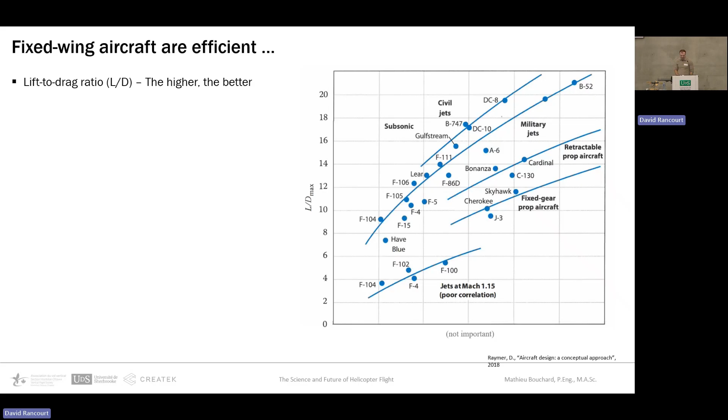There's a nice figure here that I took from some classic manuals, Raymer for those who know. The x-axis doesn't matter here, the only thing you need to know is that higher is better. There's a bunch of aircraft here, one we all know is the 747, which has an L/D of about 18, so that's a pretty good aircraft.

There are better, more aerodynamic aircraft out there, but that's still pretty good efficiency. On the lower end, if you ignore military aircraft, you have the kind of aircraft David might fly, a small general aviation aircraft, more of a brick with wings, but still an L/D of about 10, typical of these kinds of aircraft.

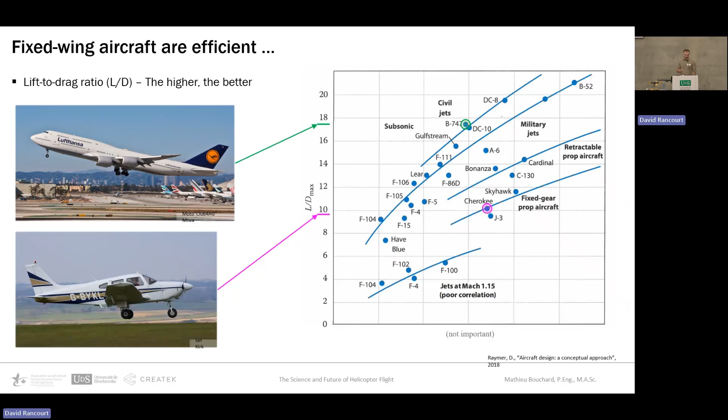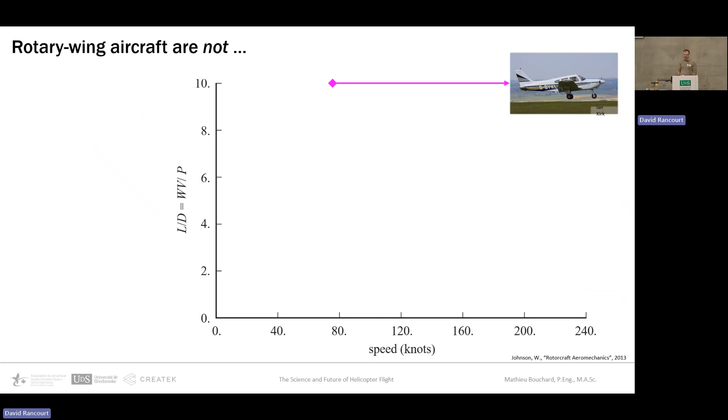So fixed wing aircraft are somewhat efficient. Rotorcraft are not at all. Here's a similar figure, L/D on the left, higher is better, although this one ends at 10 with the Piper Cherokee's L/D max. Then you have speed on the x-axis, which isn't too important here.

There are other models cheating a bit with compound helicopters, which add wings and propellers, you can get better efficiency, but not that much. Same thing with tilt rotors, which aren't really helicopters at that point, but even in airplane mode they're still pretty limited in aerodynamic efficiency. So if you want to fly fast or go long distances, your best bet is not to take a helicopter, just take a plane.

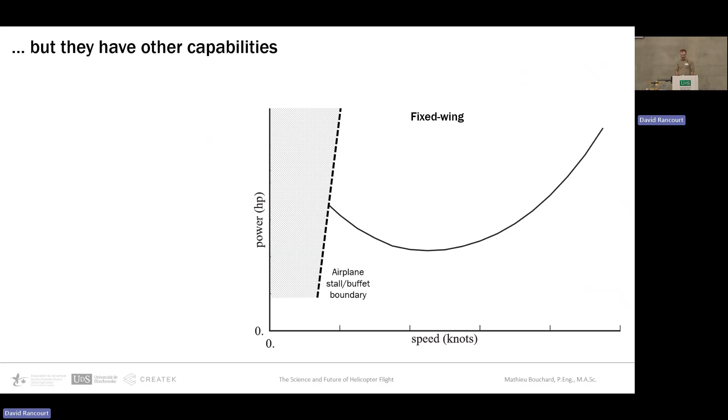But helicopters do serve an important purpose, because fixed wing aircraft are actually limited in terms of the speeds they can go when talking about going really slow. Sadly, aircraft tend to fall out of the sky if you go too slow, which isn't the case with any kind of rotorcraft, that's the only advantage they have.

So the main advantages, the only reasons you might want to fly a helicopter: if you don't have access to a runway and want to land vertically, they're the only option. Or to do any kind of sling load operation, lifting cargo from the air vertically, which you can't do with a fixed wing aircraft. Or, as this little quote from Igor Sikorsky puts it...

If you want to rescue a man who's in need of help, an airplane can come in and throw flowers at him, but it can't bring him up. A helicopter might be able to do actual search and rescue. With an airplane, you might spot the person, but you're going to leave him there.

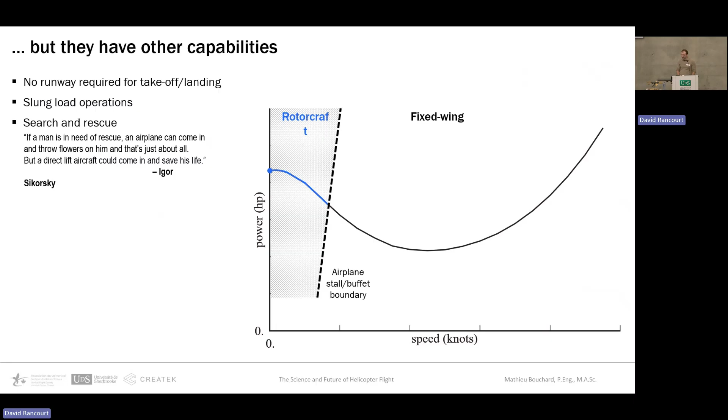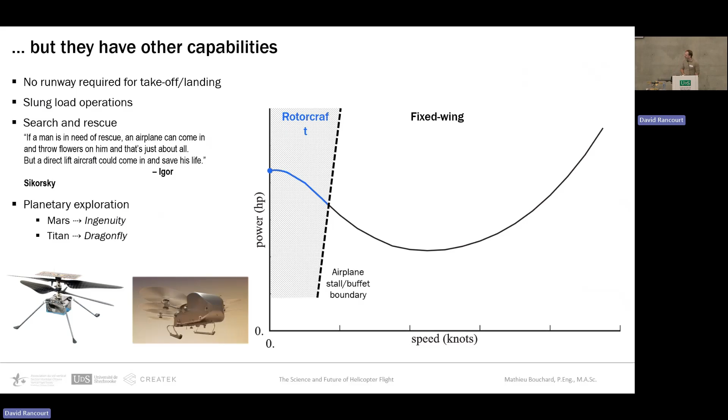One other aspect is that for some reason it's a pretty good solution if you want to explore outside the Earth. For planetary exploration, although typically fixed-wing aircraft are good for long distances, you're not going to beat rotorcraft if you want to explore Mars or Titan. So for really long distances, helicopters are kind of better than fixed-wing aircraft at that point, although those are pretty fancy aircraft.

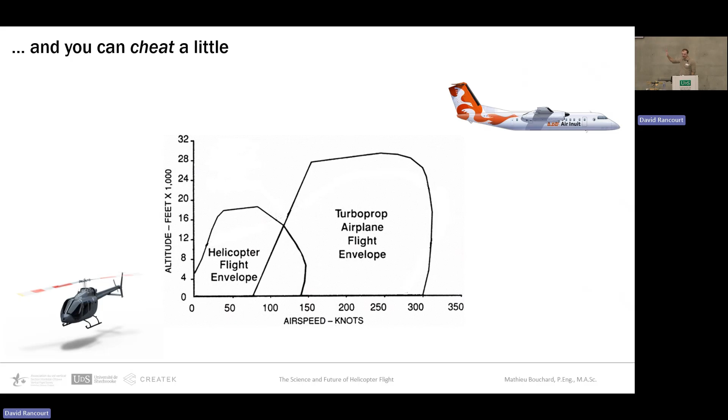Another way to cheat is to add wings but also tilt your rotors. For a tilt rotor aircraft, you'd actually call them prop rotors. You can go way higher and even bridge the gap to go faster speeds - kind of a mix between a helicopter and a turboprop aircraft. Although right now there's no civilian version that's certified, so it's kind of limited to military applications.

So that's the overall picture on whether you should choose an airplane or a helicopter, or any of the bastardized versions of the helicopter. If you want to go long distances, I'd recommend using a fixed-wing aircraft unless you don't have any runway access. And that's not something that's going to change a lot over the next decades. There are gains that can be made, but it's always going to be less efficient than the airplane.

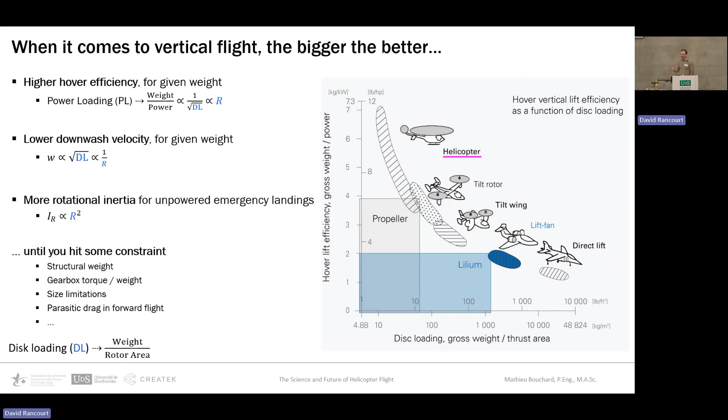Obviously there are still limitations, so bigger isn't always better. If you have a rotor as big as this room, at some point you're not going to be able to land anywhere. So there are limits in terms of weight and other design criteria. Until you hit that constraint though, you want the bigger rotor if possible - there's no reason to go for a smaller rotor diameter.

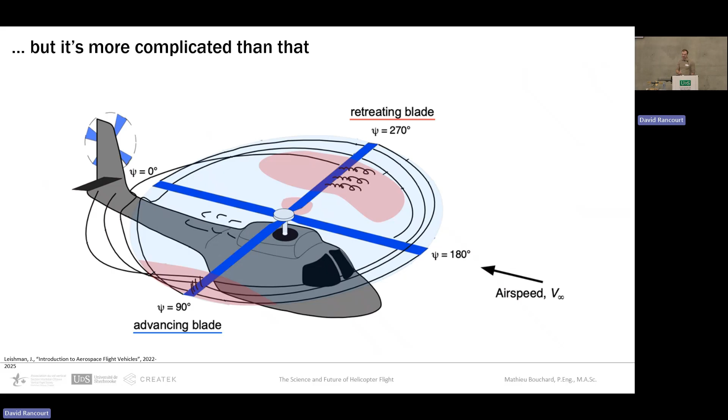Helicopters are good for vertical flight, extremely efficient, but you still want to go somewhere with your helicopter. So unless you just want some kind of elevator, you're going to need to go forward, and that's where you lose all your efficiency and things get really complicated. For this presentation I'm going to keep it to the most basic problem with helicopters: the fact that one blade is advancing towards the direction of flight and one is coming back in the opposite direction, and both see completely different velocities, creating a problem when it comes to generating lift.

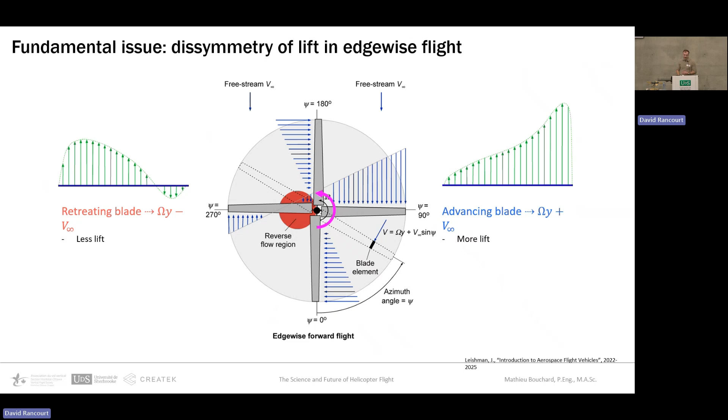So instead of having a nice airplane wing traveling at a constant speed, seeing the same airflow velocity over the entire wing, you have a rotating wing which every second sees a different flight condition, for the entire flight. You have to design a wing that operates in two completely different regimes: one near high speeds, transonic flight, and the other near stall, which is typically an issue for airplanes and also an issue for a helicopter rotor. That's the most basic issue with helicopter flight.

So the fundamental issue is the dissymmetry of lift. What that does is create a rolling moment, which historically, about 100 years ago, caused the initial prototypes - actual gyrocopters - to just roll over on their side when trying to go forward. That's not really useful for a helicopter. That's where all the complexity of the rotor comes from, trying to rein in that problem and balance that rolling moment.

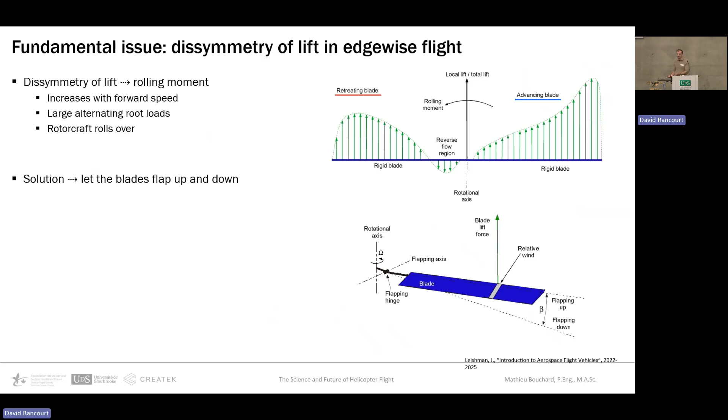It's also an issue in terms of structural loads. The solution is quite simple: if the blade wants to go up, you might as well just let it go up and then let it go down again. Don't fight it, just let it do its thing. So you basically get what we call blade flapping, with the blade going up and down in a sinusoidal motion during the entire flight.

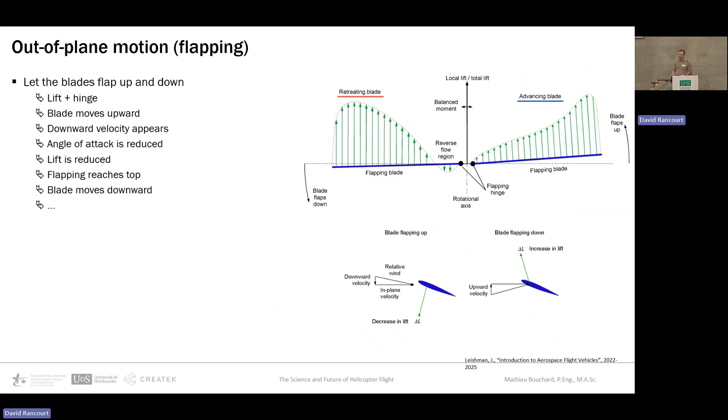If we cheat a little - no need to go too much over that - there's going to be some equilibrium reached at some point, and basically you balance that moment, and the aircraft won't try to roll over on its side anymore. So you end up with little flapping hinges, which is why rotors typically have a flapping hinge - which we don't have on this type of propeller or rotor - allowing it to go up and down by itself.

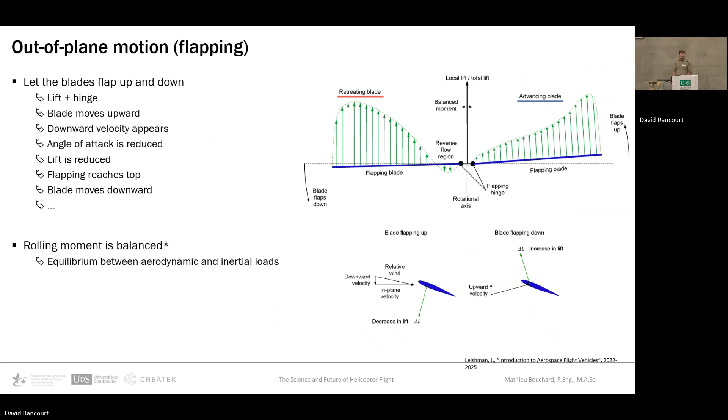There is a little issue that comes out of this. You end up with a displacement of the center of gravity of the blades. Globally, if you don't take care of that problem, you're going to end up with a blade which has extremely high loads in terms of in-plane motion, and it would simply break off, which is what happened about 100 years ago when De La Cierva was trying to fly his gyroplane.

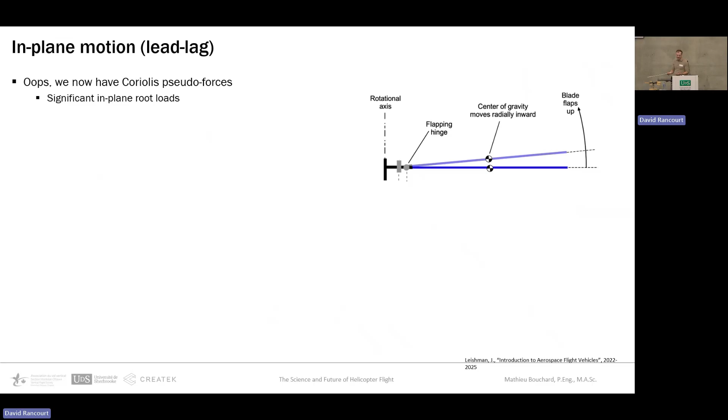The same solution functions again: just let it move forward and backwards by itself. There's no need to try and stop it. So that's where the lead-lag hinge comes from, an additional hinge where we let the blade flap up and down, but also forward and backwards.

Little issue though: on some types of helicopters, some rotors, you're going to end up with possible ground resonance. If you've seen those kind of videos, the entire helicopter will self-destruct if the pilot doesn't come off the ground. That's inherent with the type of design. If you let your blades go forward and backwards and don't do something about it, it can happen, it's just the nature of it. One solution is to add dampers to try and damp the motion, but there's still always a possibility of that happening, just more controlled than before.

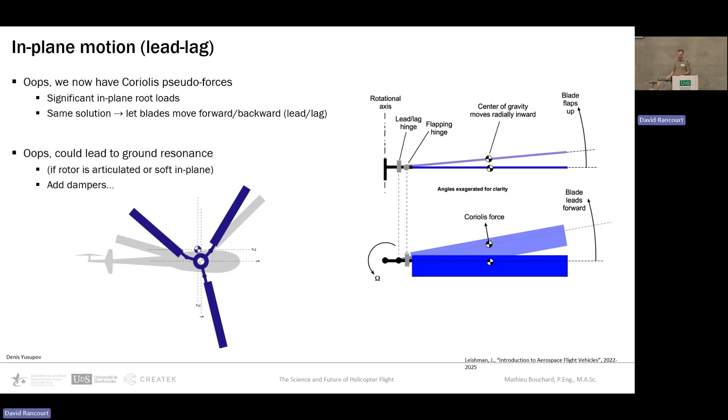Sadly, if you want a rotor which goes forward, you're going to end up with something complicated like that, which has to allow the blades to go up, down, forward, and backwards. There's really no other way of going around that problem.

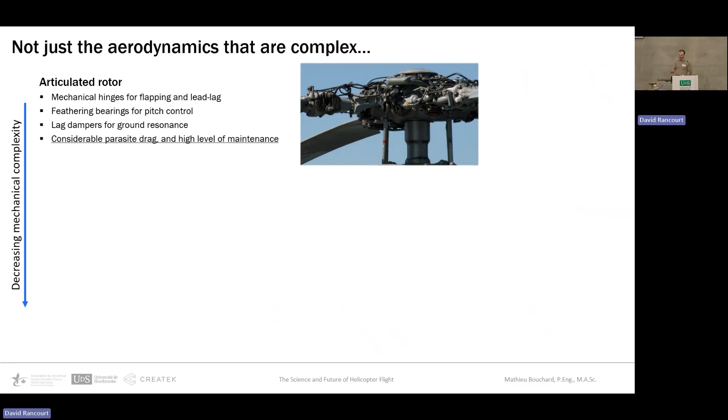In between those, you have what you're maybe used to seeing on Robinson helicopters, which is the teetering rotor. Those simplified designs work only for 2-bladed rotors. They're already relatively simple, but they have some inherent flaws, such as you can't actually do any kind of low-G flight. If you're in a helicopter and try to rapidly go down the side of a hill, you could potentially lose control, and depending on the rotor design, end up with mast bumping, which could lead to rotor separation or a tail boom strike. So they can be dangerous depending on the type of rotor. You're not going to do any aerobatics Red Bull style with that kind of rotor.

You're going to be limited to a nice little flight over the city to view the sights. A bit more complicated in terms of design, but much less complicated mechanically. You actually have here a Bell rotor head, which is hingeless. The idea is to get rid of the mechanical systems. Instead of having actual mechanical hinges to allow the blades to move forward and backwards, you just let the blades bend by themselves, so there's actual flexibility in the blade design to allow that motion. The blade still goes up and down, still goes backwards and forwards, but it's actually bending either the blade or a piece made to bend rather than having mechanical hinges. So we end up with a more simple mechanical design, less maintenance cost, and hopefully more aerodynamic in terms of drag later on.

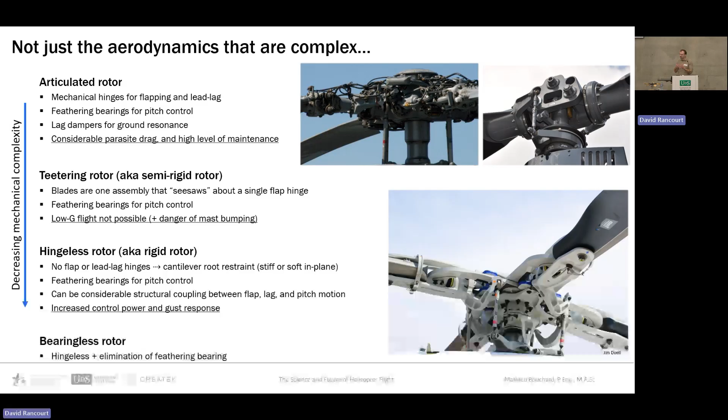The more extreme version of this is you also remove the bearings used to change the pitch angle of the blade, and instead bend the flex rotor tube. You're actually bending part of the blade system rather than having an actual hinge with a bearing to allow the blade to change angles. That's even more of an extreme solution. There aren't many helicopters with those kind of rotors, but again, you have a more mechanically simple and aerodynamic blade system, rather than the articulated rotor, which is the typical solution you'll find on most helicopters.

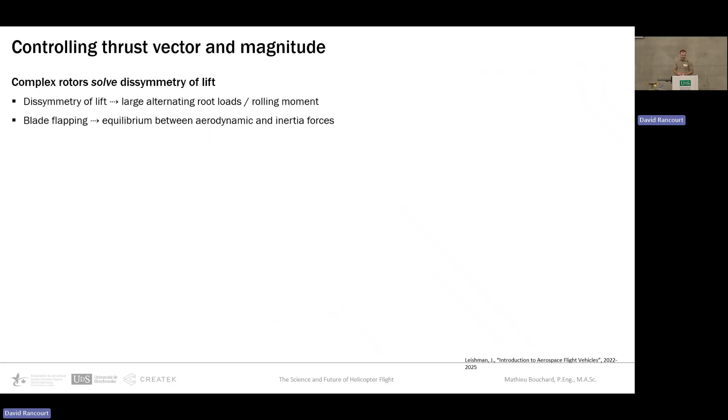So there's another issue which comes up with the fact that we're letting the blades flap up and down. Although you solve the rolling moment problem, you also end up with another problem, which is that the rotor, the faster you go forward, tends to want to blow back behind. So it tilts backwards, and the faster you go, it's even more backwards.

So unless you have some kind of propeller to pull you through the air, which is what you get with a gyrocopter, with a helicopter there'd be no way to actually go forward because the thrust vector would bring you backwards. So to do that, you actually need to find a way to control when the flapping happens, so that you can orient the plane of the rotor.

One aspect to understand is that a rotor will not actually tilt fully forward, the shaft will always be fixed with the airframe. What you'll see when a rotor seems to be tilted forward or sideways is really just the tip of the blade bending in a direction, which gives the idea that you have an actual tilt of the rotor, but rather the hub is still fixed and the blade is bending up or down.

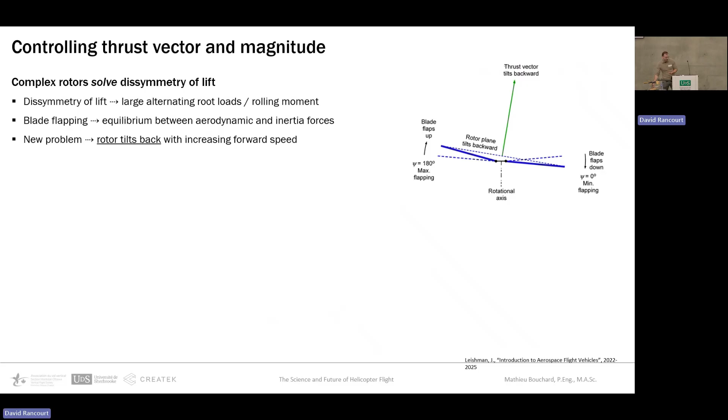So to do that, for most helicopters at least, we have the swash plate system, which is what we have here, at least part of it for this helicopter. Typically there would be another plate underneath, which allows you to either change the angles of all the blades at the same time, so you generate more thrust, can go faster or just go higher and lift more weight, or you can tilt it on the side, which will have a different angle depending on which position you are.

So one blade will be at a certain angle of attack while the other will be completely flat, and that will change when the lift is created, which allows you to play with the tilt of the propeller. For most helicopters, that's what's used. Some designs like the Kaman K-Max use another system, but it's always the same principle: you're trying to control, using a sinusoidal approach, the blade pitch of the entire system to tilt it.

So the faster you go, not only is the pilot pushing the stick forward to go forward, but he's also basically trying to balance back the rotor tilting backwards. So he always needs to put more cyclic forward to bring back the rotor forward and then tilt it even more to go faster.

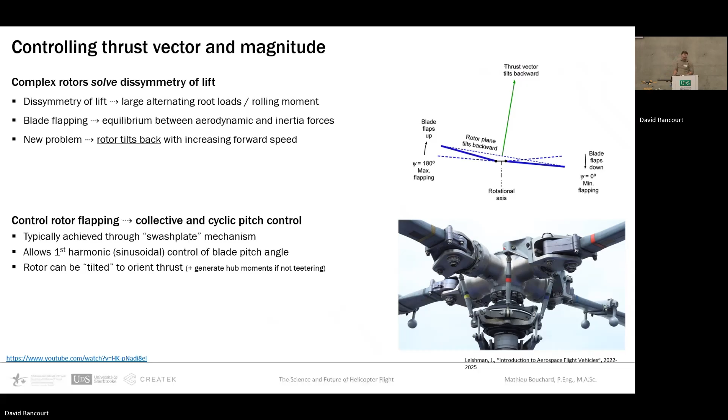And yeah, it's much more complicated than that. So that's really, really the basics. It's the fundamental problem which was solved about 100 years ago now, initially on gyrocopters and not on helicopters, funnily enough, but it's what basically allowed helicopters today to exist, and it's the fundamental principle behind every kind of helicopter now. In reality, you have much more problems than that.

As you go faster and faster, you'll reach conditions where you have high speeds at the tip of the blades. So over here, you have transonic flow, so you can imagine you're getting some really high speeds there. While on the other side of the rotor, the same blade will start stalling and get into a higher kind of unsteady behavior, which is called dynamic stall, which today is still a subject of research, and there is no nice way to model it easily nowadays still.

And what that's going to get you is, instead of having nice sinusoidal waves of thrust and something similar, you'll get really interesting patterns of loads which are generated and which the system must deal with. That's part of the reason you have so much noise and vibrations on the helicopter. It's basically a complex environment of aerodynamic interference coupling with the structure.

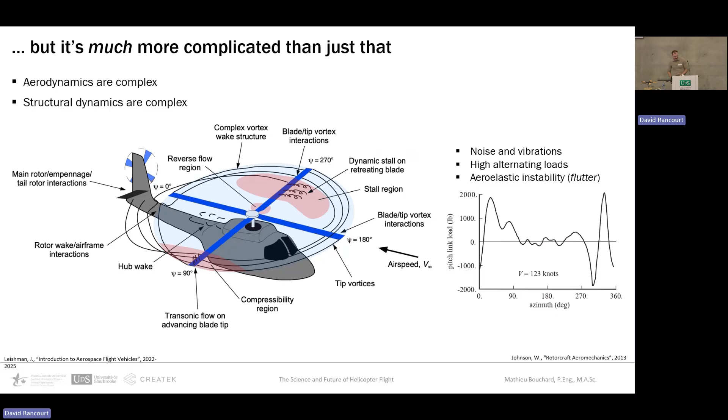So kind of a review on Rotorcraft. I have a couple slides to change the subject a bit and discuss propellers. Some of you might have seen that a lot of current aircraft designs, mainly VTOLs, are starting to use propellers rather than rotors to do the same kind of operations you'd see on a helicopter. So in a way, a propeller is really just the limit case of a rigid propeller rotor.

It's not exactly that, but it's pretty similar. Worst case, there is no blade flapping, no lead-lag, no cyclic pitch control. Some don't even have collective control, so you can't change the pitch of the blade at all. It's basically just RPM control. So that's a bit of an issue because they're not made to operate in those kinds of conditions.

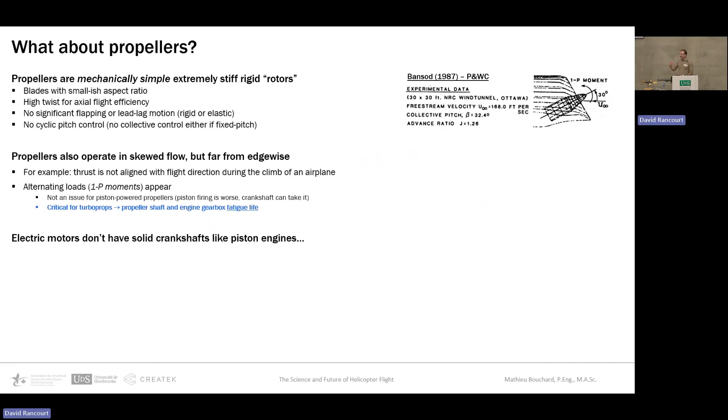I'm going to skip a little bit ahead, but one of the things I want you to get is that those flight characteristics are something more typically understood by turboprop manufacturers. Although a turboprop doesn't fly the same kind of conditions as a helicopter, they do get some interesting alternating loads too, which you have to take into account in terms of bearing life and gearbox design, which is not the case for the kind of electric aircraft designs you see outside.

And that's a bit of an issue for whether airplanes or eVTOLs, which are equipped with small motors that have small bearings. To give you an example, Pipistrel had to reduce their time between overhaul for the aircraft in the past by nearly an order of magnitude because they had issues with the bearings. It's also what killed the NASA X-57 Maxwell prototype. So bearing life is a bit of an issue when it comes to electric motors, and that's something that's not taken into account by most aircraft manufacturers of electric aircraft.

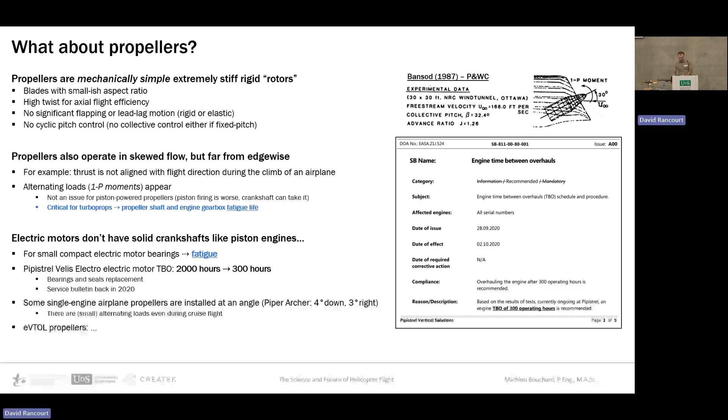So I'll skip the next slide and just do a bit of an overview - some self-promotion there, but there's something that's kind of missing in the ecosystem here in Quebec, and honestly with a lot of propeller manufacturers around the world. Having in the past done a lot of research contracts designing propellers operating in atypical conditions, there's a lot of things that aren't understood, a lot of unknowns, and that's something we've been able to help those manufacturers with by providing actual analysis capabilities. We have our own models, which we've used and validated in the past, and we're pushing to develop further to get to the level of what's typically used in the rotorcraft industry, just more modern than the old legacy code written in Fortran about 30 years ago.

And that includes doing our own experimental wind tunnel testing. Sherbrooke actually has the largest wind tunnel in Quebec. It's honestly not in the best shape, but it's the biggest. So if you have any fun things you want to test experimentally, or to do actual propeller design or analysis, especially in atypical conditions, we have the capabilities to do so, and we're continuing to develop and validate those capabilities as we go along, as well as subscale propeller prototyping, which is pretty helpful for wind tunnel testing.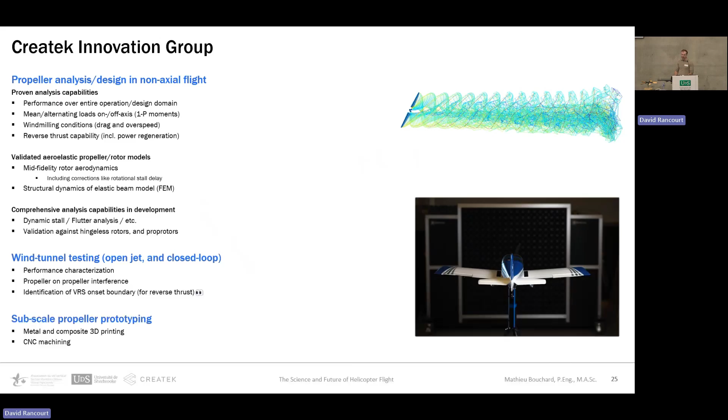That's it. Do you have any questions?

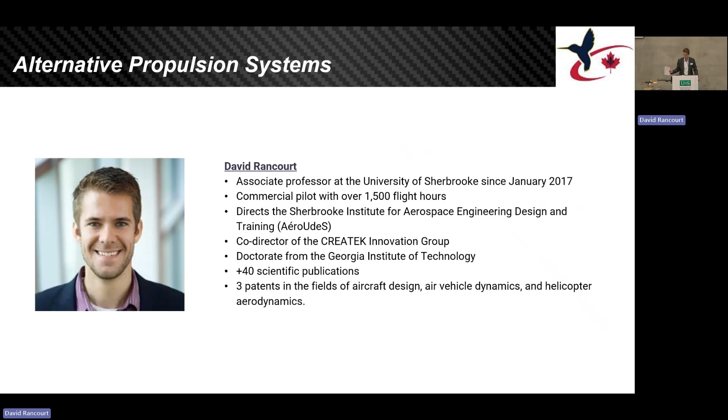All right, thanks for the introduction and for the invitation to be here today. I'm going to take different hats during this presentation. One of them is to be an engineer and to lead or co-direct the Createk Innovation Group. The other would be as a pilot and an aircraft owner. It changes quite a bit the way you see alternative propulsion when you see the actual operation of those aircraft. And finally, one implication not named earlier is that I'm also the president of the board of Sherbrooke Airport. So that means I know quite a bit about how regional airports work, funding-wise and investment-wise, and this may actually really affect how alternative propulsion will be on the market in the future.

Another comment: I actually put these slides together a couple of days ago, and these were probably the hardest ones to put together. I've been working on alternative propulsion for quite a few years now, and first of all, it evolves so fast that any slides created 4 or 5 years ago are not valid anymore. But also, any way you think about alternative propulsion, especially for vertical flight, the reasoning behind it simply cannot be linked to airplanes. Airplanes have different ways of seeing alternative propulsion than vertical flight, and you cannot really translate the two together. So hopefully I'll be able to give you that feedback today.

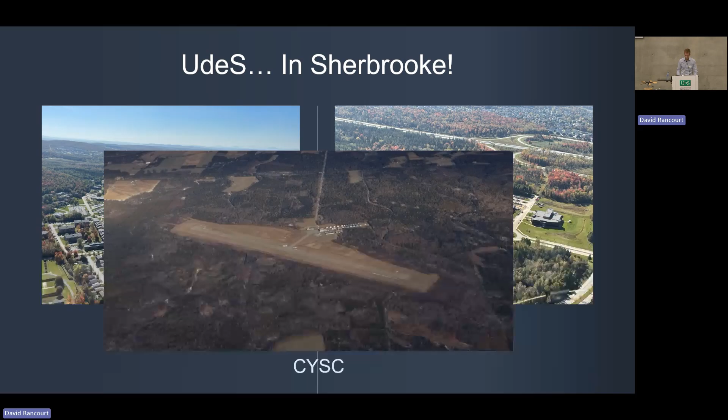Before we dive into more editorial thinking of alternative propulsion, let's look at some of the projects we've done in the past.

In 2016, we felt that in Canada there was a need to create a demonstrator of an electric airplane. So we launched a senior design project called the Zephir project, where we converted a glider, a Schweizer 233 from the Air Cadet program, into electric propulsion. We met with Transport Canada - at the time, we were the first to approach them with an electric airplane, and it was interesting, let's put it that way. Obviously, electric propulsion at the time, that's a 2-seater airplane, and it was converted to electric propulsion with static testing. In the end, it was just a single-seater airplane because we converted one seat just to battery packs. Not very good for flight training applications.

A couple of years later, we launched an all-electric airplane program called the HERA project. About 30 students over 2 years designed and built this electric airplane - a retrofit aircraft. They designed the battery pack from scratch, all the avionics, and did some ground testing, again just to shake a little bit the industry and the regulatory groups in Canada. Transport Canada was involved in this too. We actually published all the numbers - the weight breakdowns, the efficiency - so that kind of put a lot of information out there. Obviously, there were some lacks in terms of capabilities of that aircraft.

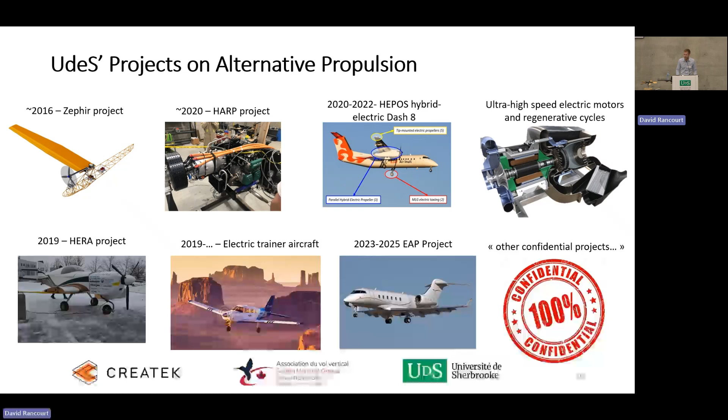But before we go further, it would be easy to start by just talking about different architectures, but we always forget the why. So let's start the opposite way around - why are we talking about alternative propulsion for VTOLs or vertical flight?

The first one, which is really obvious, is environmental footprint. We want to minimize the impact, minimize the emissions. But what emissions? Could be CO2, could be unburned hydrocarbons, could be just lead. Avgas today contains 0.5 gram per liter of lead - it's the largest emitter of atmospheric lead in the world. Could be we want to reduce some of the soot from gas turbine combustion. But in-flight emission is not all. If you produce your fuel with not-so-clean sources, considering from the well to the wake, the emissions of the aircraft might not be positive. So we have to consider: do we want to look at the whole emission just in flight, the well-to-wake, or the whole aircraft life cycle emissions? That's the point I want to talk about later today. If you have an aircraft that is 3 or 4 times bigger than a conventional aircraft, you might have less emissions in flight, but at the end, are you really greener? So that's the first one.

Well, noise - maybe you're not allowed today to fly in some specific parts of the city because of noise. If you reduce noise, maybe you'll be able to do so.

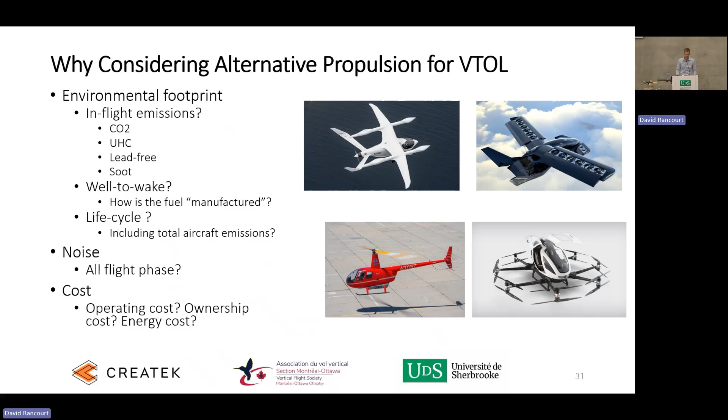Cost, and that's a hot topic. Do you want to reduce the operating costs? Do you want to reduce the ownership costs, the energy costs? Well, it's a mix of all that. And maybe some concepts will meet some of that, and some maybe not. And maybe you'll have some numbers that are essentially hidden. If you just consider energy costs for an electric aircraft, you'll realize you might be missing a major part of the cost, essentially. So these are, I guess, the most obvious ones.

But there are some non-obvious ones that, if you read in detail, you might have some insights about. IR signature. Alternative propulsion is a way to reduce the infrared signature for military applications. Military is all about performance. Why will the military invest in electric aircraft in the US? Certainly not because they're supersonic or can carry tons and tanks. It's because there are very specific missions where you might not want to be seen at all on radars.

Maybe you want to develop alternative propulsion to enable new capabilities, right? So that might not be to really reduce environmental footprint. It might just be because you want an aircraft that goes faster. Maybe you want an airship that can go backward, up, and down, and I'll give you some examples of that later.

Maybe you want to improve customer experience. An example: you know how much it costs to have air conditioning systems on a Cessna 172? If you buy that today, it will be about $50,000. Oh, and by the way, you can't really start that AC system until the engine runs. So how about if you have alternative propulsion, you have just a slightly larger battery that allows you to start the engine, program all your avionics, but also pre-cool your cabin. People will probably be able to pay $100,000 for that option in the US. So these are alternative cases where alternative propulsion might actually enable that.

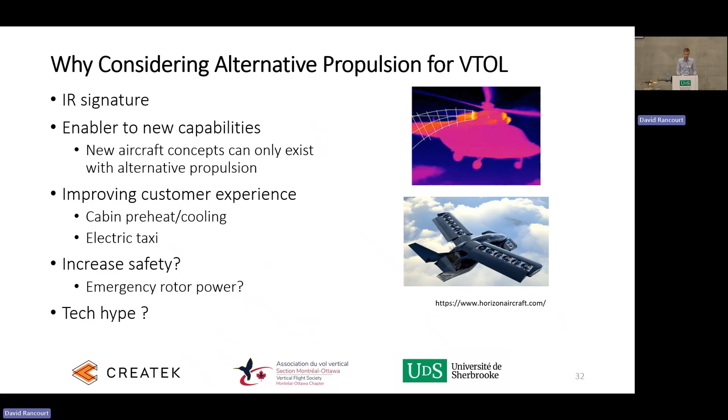Increase safety, right? So alternative propulsion systems are sometimes combined with, let's say, electric emergency systems for rotors. I'll give an example of that later. Or it could just be a tech hype, right? There are cases where we want to showcase new technology, and we just have to realize that this might be the case. So let's look now at the different architectures and who's worked on each of them.

So alternative propulsion, there are multiple definitions, but let's say we have all-electric concepts. We have hydrogen-powered concepts. We have hybrid electric, basically using fuel. Internal combustion engines that might be used for vertical takeoff and landing aircraft, or basically brand new engine concepts. So hydrogen, you can have multiple approaches: you can burn it, or you can put it in a fuel cell. Hybrid electric, you have series, parallel, and a mix of all that. Internal combustion engines, you have brand new technologies for ICEs, but you can also have turbo diesel applications, and I'll give an example of that later.

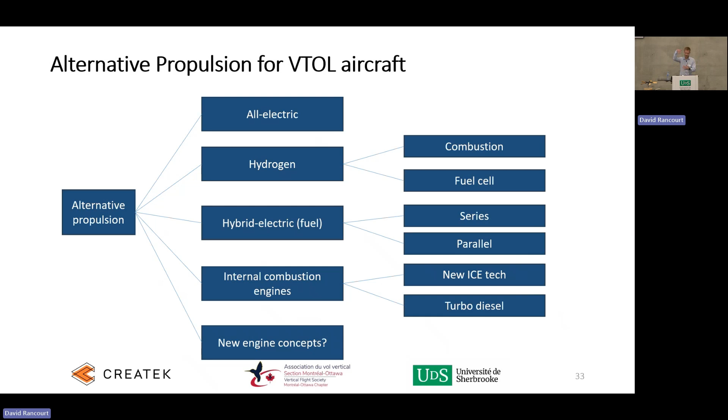So you see there are so many concepts, and the thing is, each of those propulsion architectures may or may not be compatible with physical aircraft architectures. So that becomes a really complex problem. You have on one side the propulsion architecture, and on the other side you have the actual aircraft concept. And this is where it gets really complicated.

So let's look first at all-electric VTOL propulsion. First of all, the first flight of a manned aircraft with electric propulsion on the Robinson R-44 was done in 2016. The first cross-country flight between two airports — and believe me, these are pretty close airports — was in 2022 with Martine Rothblatt, the CEO of the company that funded the project, as the pilot herself. You have the Robinson R-66 that was just announced a few weeks ago, where they plan to take the bigger version of the Robinson aircraft and convert it to electric propulsion.

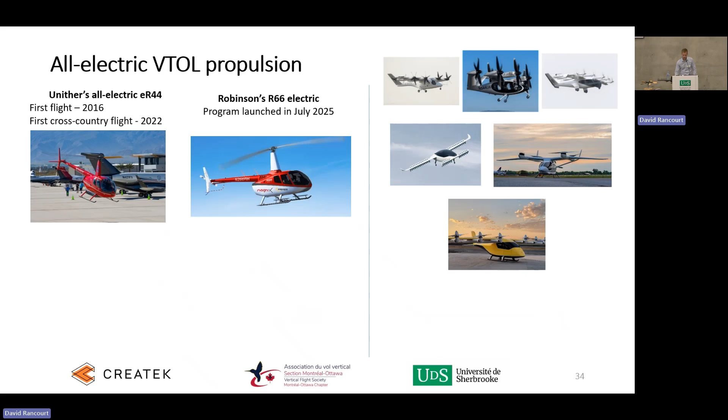And you have all the other concepts, and we're not going to go through that today, but there you can have the Lilium with over 30 propulsors here. You have the all-electric Wisk aircraft, Beta, Archer Vertical, and Joby, sponsored here.

So why would you want to go with the less efficient concept that Mathieu presented earlier? Well, it's easier, not easy - it's easier to certify, most likely. That's the approach Robinson has been taking, because you essentially do an STC, so you modify it. It's like changing the brand of an engine - you can do that on a vehicle pretty easily. So that might be a way to get in the air faster.

You have a reduced power requirement in hover because of the low disk loading. However, cruise efficiency is low, and I'll give you a couple numbers later. If you look at the right, all those novel concepts have a really higher cruise efficiency. They can have reduced noise.

For example, a Joby aircraft takes off with 1,000 RPM on the props, but cruises at 250 RPM with less than Mach 0.35 at cruise. That's how they get really low noise, and that would not be possible with gas turbines. However, complex certification, really high empty weight ratio - it simply uses electric propulsion as an enabler of those architectures. None of them could work if they were not using electric motors.

Let's do an example. So I have here just a very simple lithium-ion battery, like the ones you'll see on Teslas, but also on electric airplanes. We're going to do a very simple sizing case.

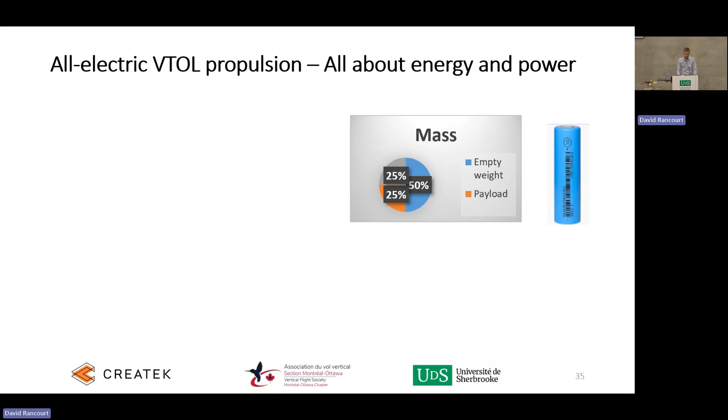So let's assume the following characteristics. Let's say we have a relatively low efficiency rotorcraft with an equivalent lift to drag ratio in cruise of 3. We have 50% of the mass being the airframe, the motor, the seats, and we put 25% of the weight of the vehicle to be the batteries. Essentially the 25% left will be the payload. We assume about 200 watt-hour per kilogram that is usable.

You can only do 55 kilometers with that rotorcraft. That's a theoretical maximum distance you can do if 25% of your rotorcraft was filled with batteries. So we're not like the Tesla case where you say we're just going to put more batteries and it's going to work. If you put more batteries, you're reducing your payload. If you put 50% of the vehicle to be batteries, you have a remote control helicopter with no payload, right? So that's the harsh reality.

So if you want to have 500 kilometers like the original aircraft had, it's a 10-fold increase in battery energy we need. If we don't do that, let's say we just have half of that increase, and you say, well, let's make the helicopter bigger, let's put more batteries in it - you get into the weight growth approach, meaning you'll get a helicopter where 10% of it will be payload, 40% will be battery. But if you wanted to carry a ton, now 10% of a ton - well, it becomes a 10-ton helicopter. So you get into that increase of size.

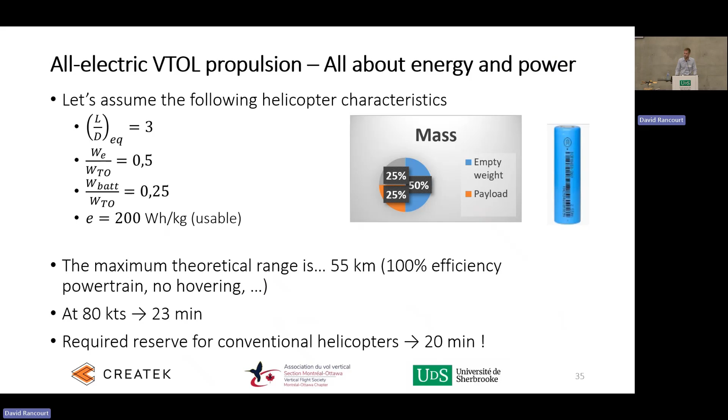So at the end, we're not close - we're not even close for electric concepts to meet how essentially the original helicopters or aircraft are in terms of performance. And be careful, most of them are much heavier, and there will be consequences to that.

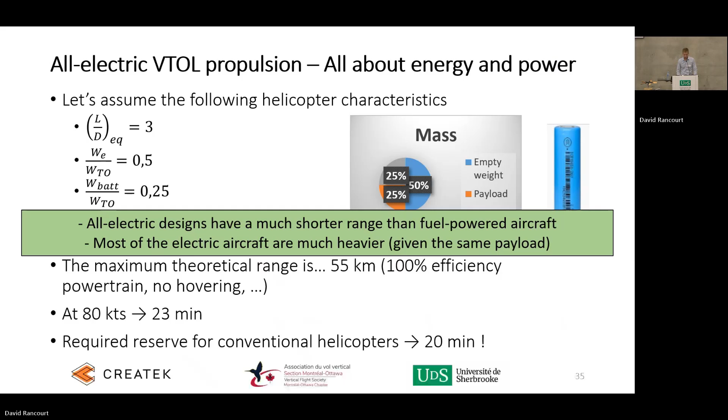Give you just an example of an airplane. That's the one I used to fly - I sold it last week. The Cessna 210. Just to give you an idea, that aircraft was built and was flying before we walked on the moon. So that gives you the timeframe of the Cessna 210, Bravo version.

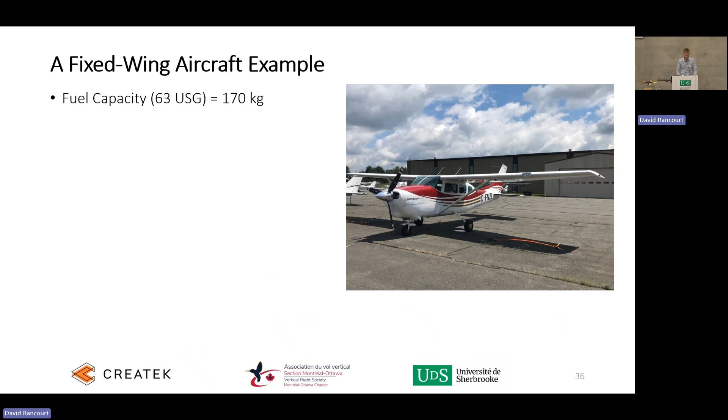63 gallons of fuel - let's say you top it off. You replace that 170 kilograms of fuel by batteries, assuming 250 watt-hours per kilogram, and 85% efficiency on the motor and drive. It needs about 165 horsepower at high speed in cruise, so 140 knots in cruise. Neglecting takeoff, that gives you 20 minutes of flight time.

You fly 90 kilometers. This is a flight I did last year - I flew from Bromont with my family on board, landed at Prince Edward Island. That's a 3-hour and 15-minute flight, 780 kilometers, and I used 60% of the fuel tank.

So that is, again, the harsh reality of electric airplanes, electric propulsion. It's not about 'we're almost there, we just have to double the battery capacity.' No, it's a 10-fold difference to actually match an aircraft that was designed back in '62. And nowadays, two-seaters with recent engines can actually cross the ocean on 120 liters of fuel. That happened last year.

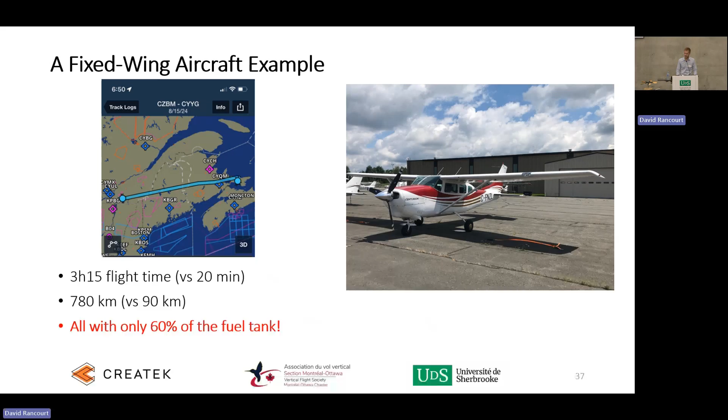So let me just take away here: for now, all electric aircraft are very far from getting the range of conventional aircraft. So it's not the current customers that are actually going to buy those aircraft - it has to be new customers that are satisfied with very short range. So it could be trainings, local flights, urban air mobility on very short distances. And again, the clean energy must be available. If you charge that using a generator, well, you're just better off burning the diesel directly in the aircraft.

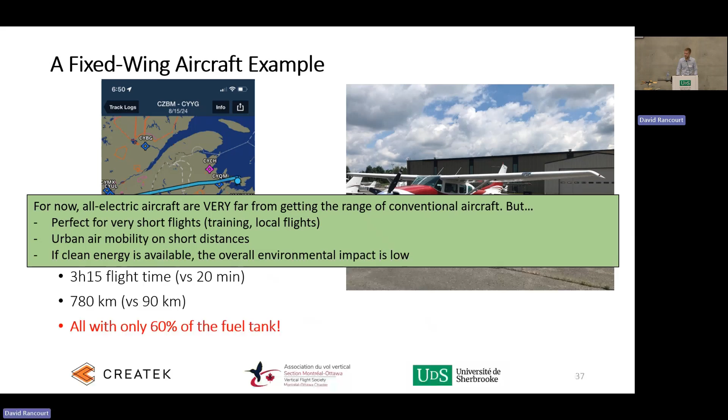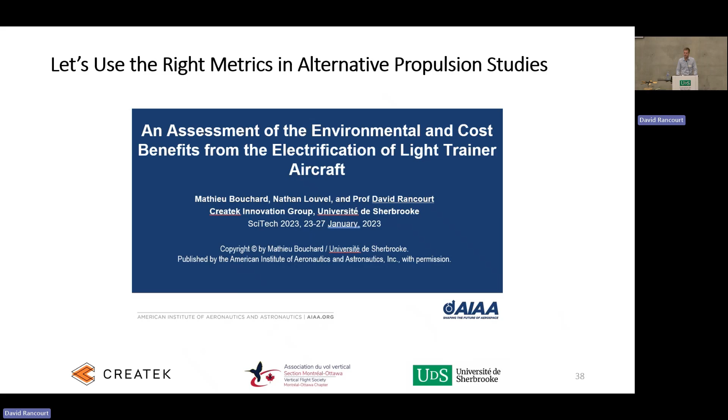So we did a conceptual study, Mathieu and I, back in 2022, where we tried to assess the environmental impact of electrifying a light aircraft. In that paper, what's really interesting is we also did resizing. One of the conclusions was the following: if a propulsion technology is heavier and thus reduces the actual aircraft payload - if you take a 4-seater and it becomes a 2-seater - it should be compared not with the 4-seater aircraft, but with a much smaller 2-seater aircraft with reduced capabilities. And that is a major flaw that we see in at least 75% of the conceptual studies.

And again, clean energy must be available. Let me give you an example - an aircraft from a couple of years ago. It was announced with the magniX program: a Cessna Caravan with electric propulsion. They expect 100 nautical miles of range with 4 or 5 passengers, with about 1 ton of batteries on board, and very slow flight speed at best L over D. Well, should you compare it with the original turbine-powered Cessna Caravan? Hopefully not, because you're comparing essentially a scooter with a Harley-Davidson. You have to compare it with an aircraft with the same capability.

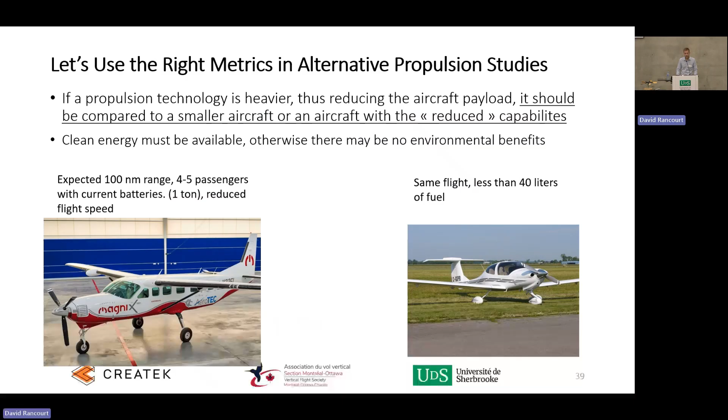Now, which one has less environmental impact? The one where the takeoff gross weight is 1 ton, or the one that has a ton of batteries on board? So we always have to go back and compare with the right metrics, and that is, I think, one of the key takeaways here. I'm positive about these new alternative propulsion technologies, but just make sure we do fair comparisons and use the right metrics when comparing them.

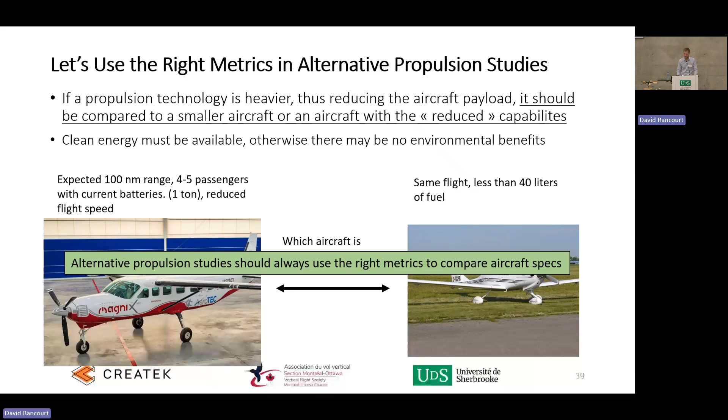One example is the electric DA40 that we studied in the paper. If you take a 4-seater aircraft like the DA40 and remove 2 seats, well, it's not a DA40 anymore - it's a DA20, the 2-seater version. So we just have to do the right comparison.

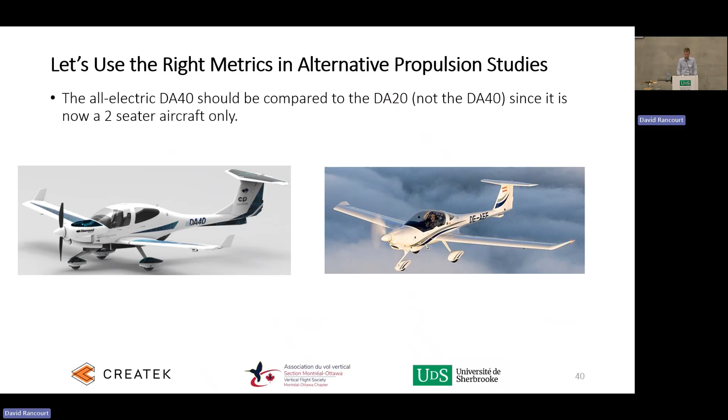One way to mitigate the very low energy density of batteries is to go with hydrogen. Really interestingly, the first helicopter in the world to fly with a fuel cell was done in Bromont this summer - it's Unither's H2-powered R44, with the picture showing steam coming at the back of the fuel cells.

Joby has done a similar approach with their aircraft, without anyone on board, using liquid hydrogen. Essentially, I'm expecting - and Unither is also doing this modification - it will all be liquid hydrogen for those vehicles, just because of the efficiency and the size of the system.

However, the fuel cells are still heavy - they are really, really heavy. So you're reducing the capability of the aircraft. The hydrogen-powered R44 is not going to have the same range and payload as the one with conventional propulsion.

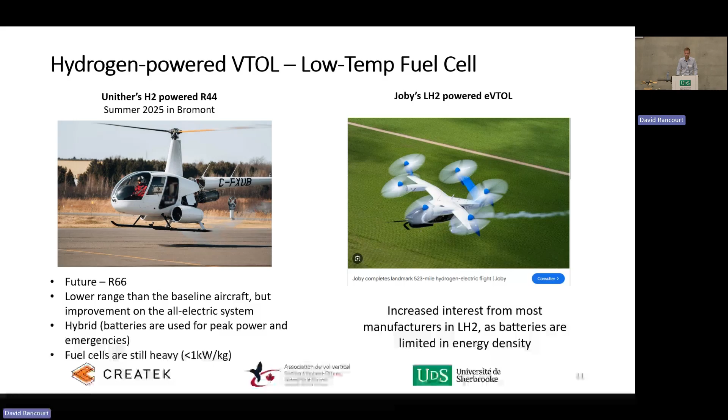But it's still a pretty good step forward, and I'm pretty sure hydrogen for vertical flight is one way to go. Again, if you accept that you're not going to have the flexibility to go anywhere, and you just want to go from point to point, I think it's a good option.

But you still need clean H2 to start with. If you produce that H2 from any source that isn't clean, and you have a heavier aircraft, your fuel must be pretty much clean. Otherwise, you will have a higher environmental impact.

One approach with fuel cells to improve the efficiency, not in terms of efficiency like we define it, but in terms of weight, is to go with high-temp fuel cells. It was announced a prototype should fly pretty soon with those high-temperature fuel cells that are much more power dense. There's no liquid to deal with because it comes out as steam. Some preconditioning is required. High potential, but yet we haven't heard back in the last few months where that project is, so expecting there might be some hurdles, some technical problem there.

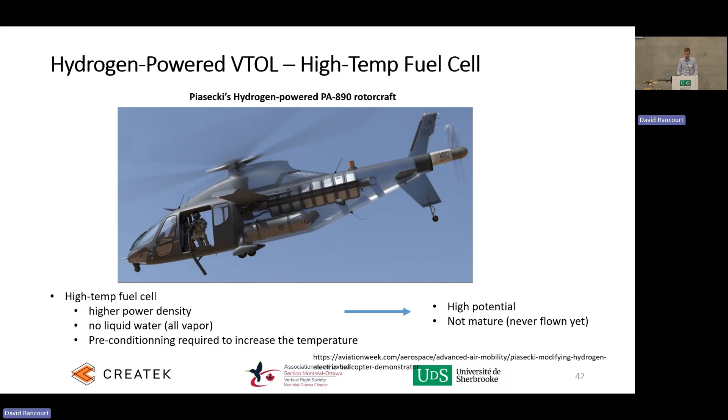One approach that I think has been understudied is hydrogen combustion. Why? Because we say hydrogen means fuel cells, it's electric. But at the end, if you take hydrogen and burn it carefully, why would that not be a good option, right? Hydrogen can be produced using hydroelectricity, clean energy, so hydrogen is essentially an electricity carrier. If you burn it, you have less of the problems of electric propulsion today in terms of having to deal with the fuel cell, water, density, and what you do in the winter.

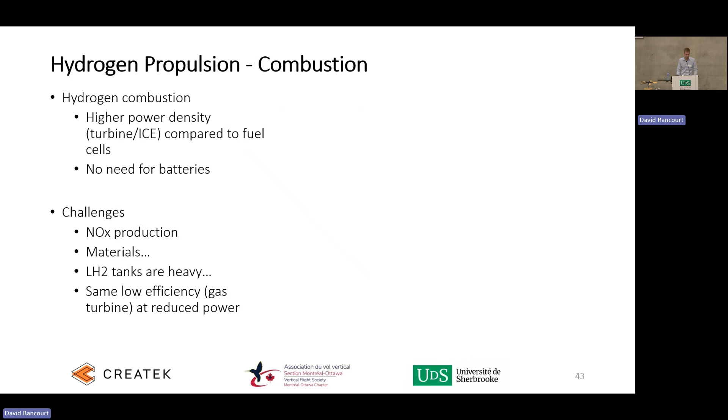So hydrogen combustion has this higher power density availability. It could be a turbine or an internal combustion engine compared to fuel cells, and no need for batteries. Challenges would be NOx production, materials embrittlement, and multiple other challenges. But yeah, there's still a pretty high interest. RTX just announced there will be a test with hydrogen combustion, and the company has done some hydrogen combustion back in the days - if you look at the literature, it is a pretty interesting approach.

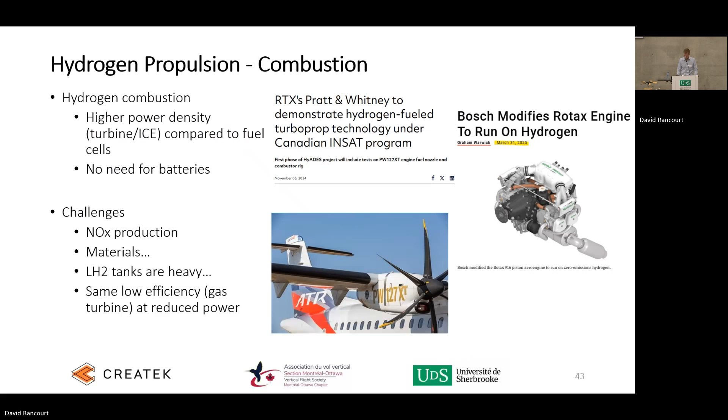Recently, the Rotax engine was converted to burn hydrogen. So look at those options - now we can burn hydrogen in a certified engine. Well, the engine is not certified anymore because it's modified, but yet it has been done and it works. So it is an alternative system that should be considered.

And combustion allows for one important thing: dual fuel concepts. Dual fuel concepts are the enabler for the transition between two technologies. If you can put jet fuel or hydrogen in your engine, that's a way you can fly to any airports today. We did a demonstrator with a 3-fuel internal combustion engine - hydrogen, methanol, and conventional fuels - and we were able to switch the power source as the engine was operating. We believe that might be an interesting future.

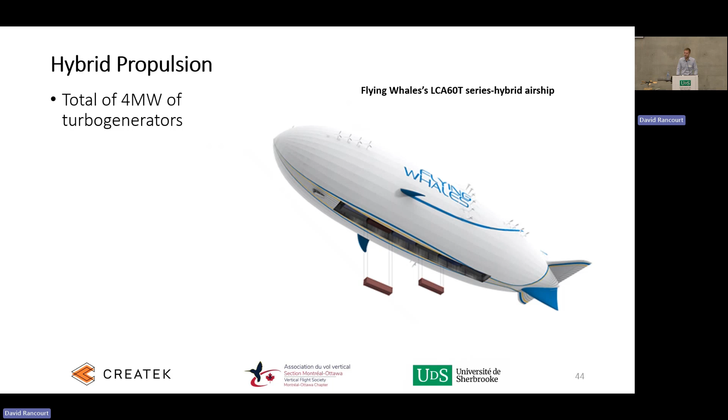Hybrid propulsion - well, vertical flight, I wasn't sure to put an airship here, but it is part of the vertical flight approach. They announced that they will also be creating a manufacturing facility for North America in Sherbrooke. So Flying Whales is a series hybrid airship, although I think it hasn't been announced very publicly, but recently, yes. They have a 4 megawatt powertrain, so gas turbines produce electricity, and that electricity is shared across the whole airship. Batteries are used to dampen all the peak powers in the system, and then you have 32 propulsors with 4-meter diameter props. So it's a pretty massive system.

But at the end, why are they doing it? Well, because with the airship, they want to be able to move up, down, backwards, sideways. So you're not going to put 32 internal combustion engines or 32 gas turbines, but you're going to have 4 gas turbines with 32 electric motors. So alternative propulsion here is a means, essentially, to enable the new capabilities on the airship.

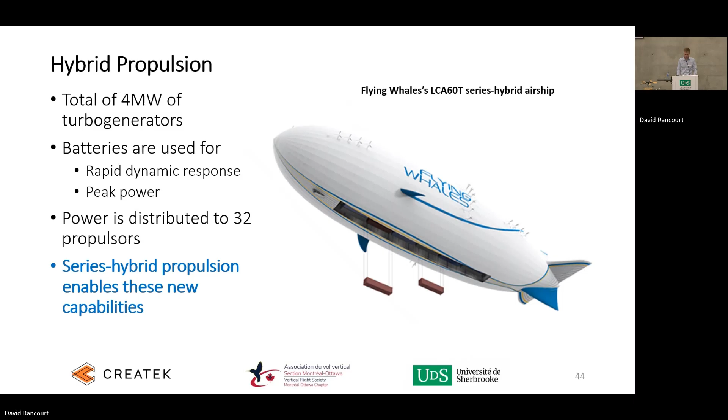They're not going to need chargers. Their vision is to use a gas turbine to charge the batteries. So it's only a system designed to improve the capability of the aircraft - no alternative propulsion here, no way to have this 250 knot aircraft flying otherwise. It's not about efficiency in terms of environmental impact. It's about performance and capabilities, and customers being happy to fly 250 knots at low altitude.

And by the way, they use the heat generated from the batteries to de-ice the leading edge. So it's a very synergetic system that is quite interesting, and they have a half scale system already flying. And it's a Canadian company.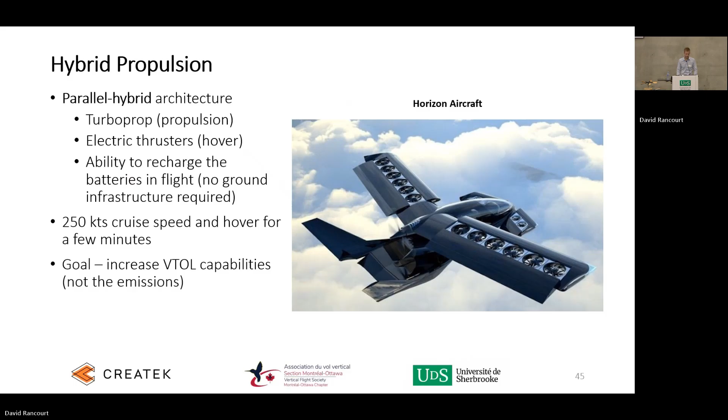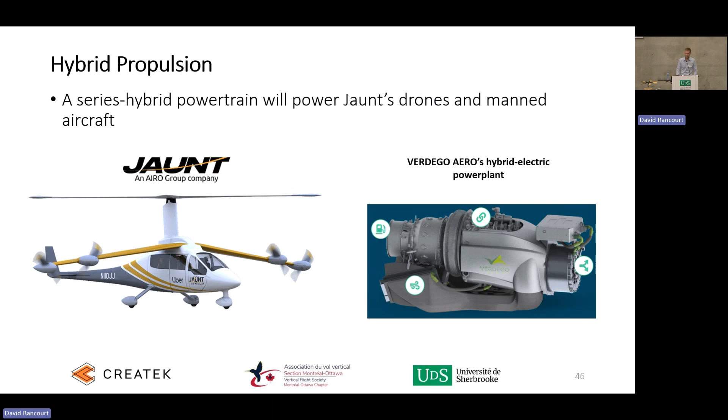Hybrid propulsion in general, we should not refer to hybrid propulsion as range extenders. All the concepts that we studied that say we're going to use electric power, and then if you want to go further, let's turn on the turbines or whatever, at the end turned out to be essentially not a positive in terms of efficiency at the aircraft level.

There's a hybrid propulsion system. Either they have to allow for an increased efficiency in the gas turbine or the engine itself, so there has to be parallel hybrid and mild hybrid system to improve the gas turbine efficiency, or increase the aircraft capabilities.

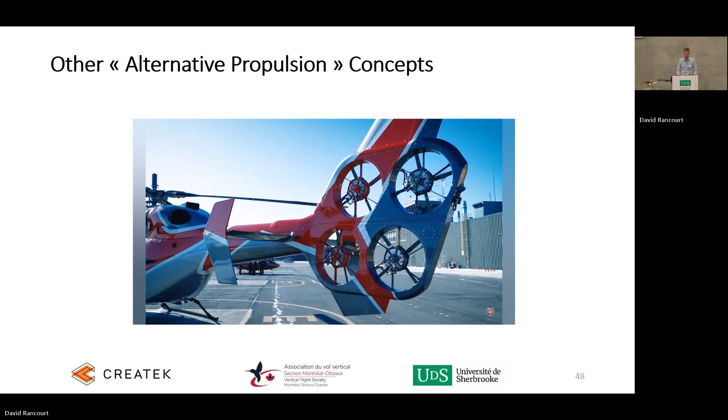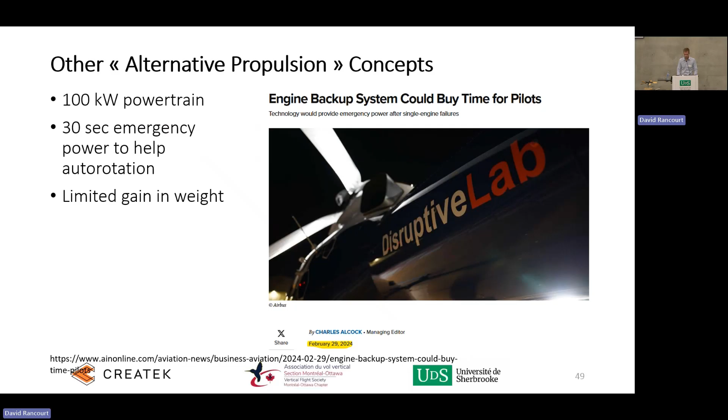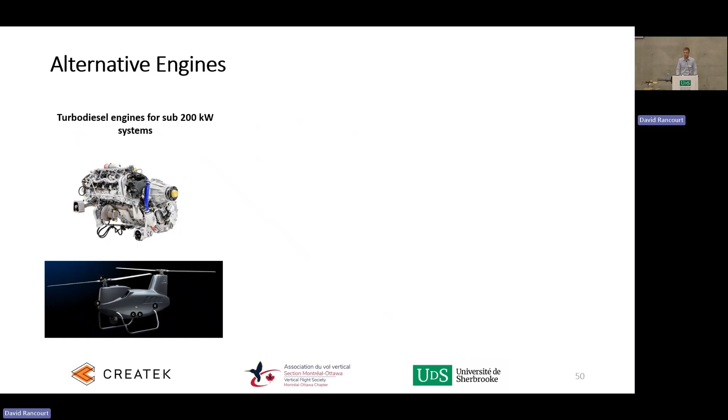Alternative engines. Turbo diesel now is something so that at the lower left it's actually a drone, but it's a 1,000-pound drone working with a turbo diesel engine. Flight capability, 10 hours flight time. For rotorcraft, that's pretty amazing with a 40% efficiency engine.

Turbines with new thermodynamic cycles, over 35% efficiency with sub 200 kilowatt systems. Again, very novel architectures. Or internal combustion engines, right? We can bring those back into a twin engine approach where we don't like the reliability of internal combustion engines, but if you have two, that might be better, and that allows burning hydrogen pretty nicely.

I'm going to skip this one just for time.

So what are the main challenges, right? I presented a couple of challenges here and there, but I want to present one that is really critical, and I'm going to put on the hat of an engineer here, but also the president of the airport. It's called infrastructures. So here's an example.

Batteries should be kept at near room temperature for optimal performance. That's interesting. But hangar space, cost, and landing fees depend on the aircraft size and weight. Currently, it costs quite a bit if you land a twin engine, 6,000-7,000 pound aircraft at an airport. You're going to easily have $100 to $200 of fees to land.

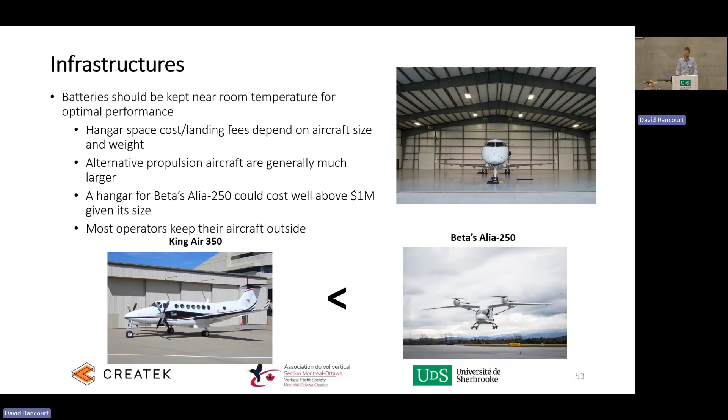While if you look at the King Air on the left side, that's a 10-seater aircraft, it will stay outside at minus 40, turn the engine on, and you'll still take off. So again, that's a cost that should not be underestimated.

If you have 20 electric-powered aircraft, you're going to have high-power conductors under the pavement and new facilities. It's not possible to take an aircraft and book a full spot at the fuel tanks for an hour. So how would that work for a large fleet of aircraft?

So the reality is, if you take the space of a King Air while you have the performance of a Cessna 210, you might be surprised by the bill you'd get at the end.

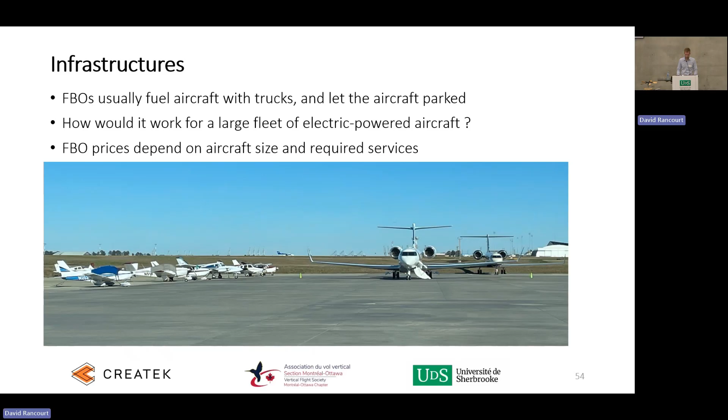Electric chargers require a significant investment, both from the charger itself, but also the power line. Sherbrooke just added a new power line to be able to handle the increase in power requirement of the airport, and we're probably close to a $500,000 investment just for that power line. And we cannot charge 5 aircraft at the same time using that line.

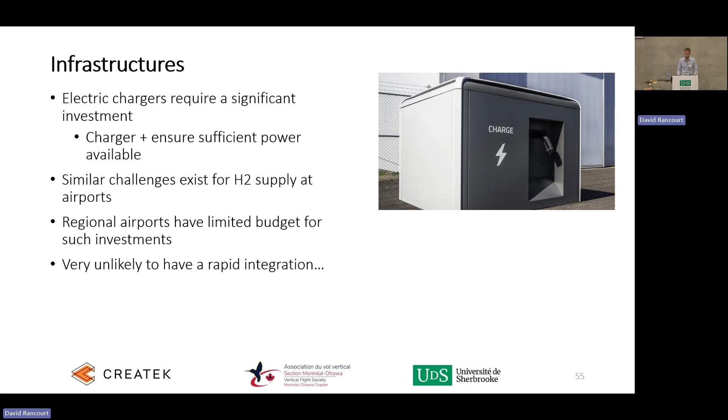Similar challenges will exist with hydrogen, and today's budget from the government level to fund regional airports to put those chargers in place is none. Right now, there's no way to fund that using government funding.

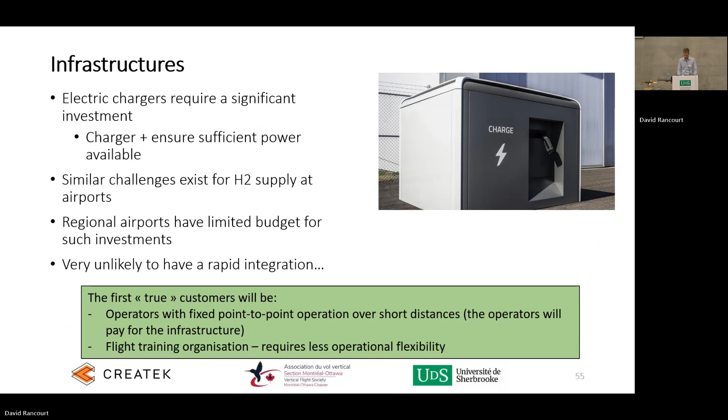So the true first customers, I believe, for those technologies will be operators that do point-to-point operation over very short distances, and the operators will actually cover all the costs associated with those infrastructures. Flight training operation is interesting too - you always land and take off at the same location.

An hour and a half flight, 27 liters of fuel for the total flight. That flight using an electric aircraft would take 2 days because I would have to stop 6 or 7 times to cover that distance. And that aircraft is powered by a 1950 Lycoming engine. So that is the true reality of electric aircraft, both for the VTOL application and conventional.

Well, we say electric makes aircraft quieter. Here's an example: the world record for the quietest aircraft was set in 1969. It was an internal combustion engine with a good gearbox and exhaust system. Again, electric propulsion is an option, a solution, a technology, but it's not the only one to consider.

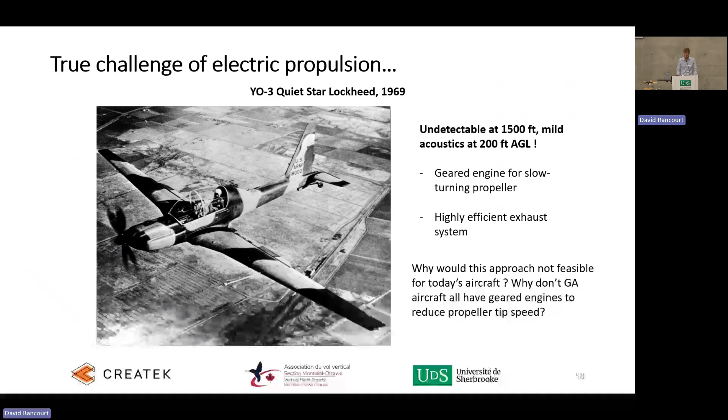Last slide. The alternative propulsion here, I think there are numerous reasons why you want to go there. It could be for reducing environmental footprint on a very specific short distance concept. You might want to use hydrogen for longer distances, but you're not going to be able to replace conventional rotorcraft or conventional aircraft with a purely electric or hybrid electric system. It can be an enabler for advanced concepts.

Like Flying Whales airship, or multi-rotor systems, or Horizon's 250 knot helicopter. And that enables new capabilities, right? So it's not all about environment - sometimes it's about performance and meeting the customer needs.

Always use the right metrics. A big aircraft carrying a very small payload is not a big aircraft - it actually should be compared with a small aircraft.

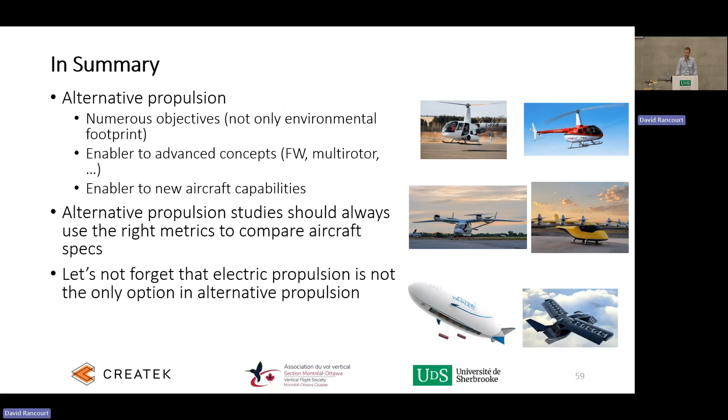Electric propulsion is not the only option. There are multiple others, and I feel that in the last 7 years in Quebec, we pushed on electric, we pushed on hybrid. But it was more technology push than technology pull. At the end, we forgot - or I've seen companies, partners, that said, I cannot fund that project because there's not the word 'electric' in it, right? So just be careful of that.

We have to listen to the reality of the market, and essentially listen to customer needs, because at the end we need to have those aircraft flying for all those initiatives and companies to go forward. Thank you.

So first of all, thank you for the presentation. Just wondering, why do you think a lot of the eVTOL companies will market a hybrid concept for military use and then an all-electric concept for the commercial side?

Good question. Well, hybrid electric is the only way for those concepts to actually do a real mission, right? Outside of remaining in the city and doing just short hops. So for the military, hybrid electric is, for example, the way to go to a destination, stop your internal combustion engine, kill the IR signature, do your mission, relight, and leave, right? So that is one reason.

The military in the US is also a pretty major funding source. So I did my PhD there, and you'll see the military will give funding, sometimes even in cases where technically it may not make sense, but they know it's going to help the company grow. Right, so that is definitely a reason.